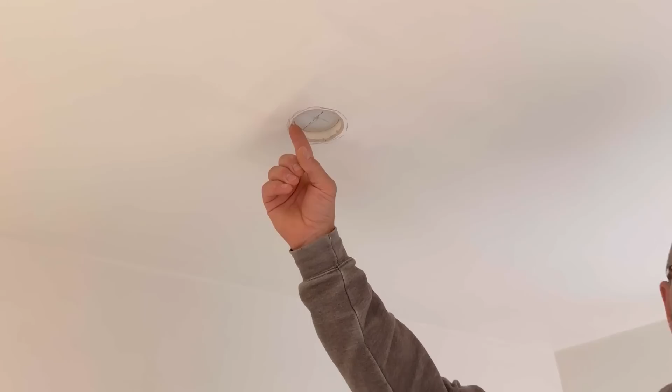If on your job you have people, now we won't use derogatory terms, who are stupid, incompetent, using too much haste and not the correct speed, overly rambunctious when cutting holes out my ceiling. We will show you later how we repair it and put it right.

Measuring stairs, building a step, finishing a floor, starting to plaster are a few things that we've got left to do on this job. And also, we need to talk about at some point the covering of this block work, which is going to be render at the bottom up to where the top of the screed is now, so bed here, and then at the top there we're having a nice cladding.

We haven't gone into that yet, but we will do in depth, and we'll have a little video for you because myself and Matt actually went to visit K-Rend in Belfast in February. So we did a little video while we were there, while we were doing our little rendering course, just to familiarise ourselves with the product, because that's what we're going to be using.

So we can talk you through that a bit closer to that stage, and then we'll put the video on for you as well, maybe in the midweek, maybe a Tuesday, just a bit of an extra, just to see me and Matt going through the processes of that and enjoying ourselves in Belfast. So we'll go through that with you. Right, let's have a look what we're up to first.

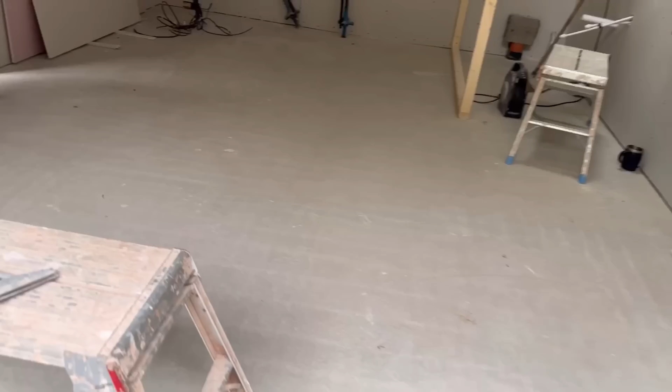Beads is what Matt's doing this morning. Good morning. Morning. This is where we left ourselves on Friday. I have just started to clear everything up. Can we get everything out of Matt's way now? All the tools up, all the timber. All this will go, ready for Matt to start getting pink on the walls again.

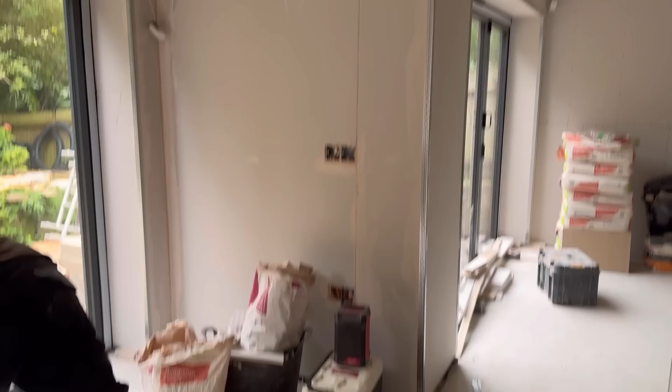I am going to build a step for there. We've already talked about it. I'm not going to say any more, I'm just going to do it. I'm going to build a ladder frame up for there, up to this floor level. So Matt can then run the plasterboard up, and then he can get around the perimeter of there, beaded as well, ready to do his ceiling.

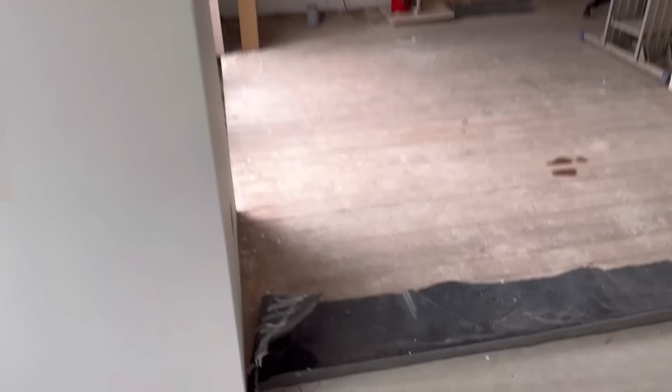And then I've got to put a piece of timber across there to run what will be the 9mm ply on top of this floor, which we've already talked about, over the top of that, onto the timber there, and put a bit of insulation there. That is the basement down there, you can actually see. There we are, into the basement. So I've got to get those jobs done.

And have a look at this extractor as well, I think. Try and get that in there. And hopefully that all goes in lovely. If it doesn't, we're in trouble, ain't we? It's all plastered and painted now. The ducting is there, look, you can see that. That's the ducting we put in a few episodes ago.

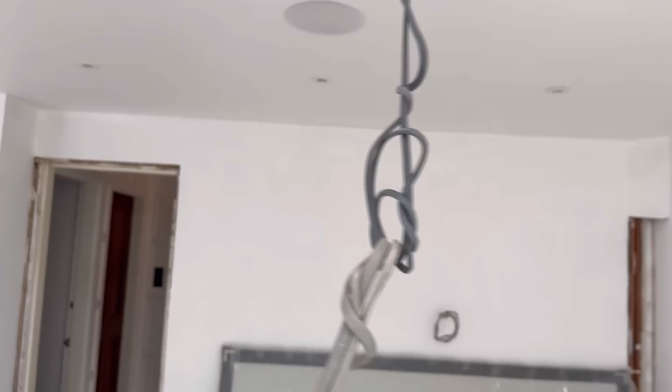So I will connect onto that. We've got some flexi square ducting. I'll connect onto that and hopefully fix this in place. That's another job we're going to do. So we'll just get on with it, I think.

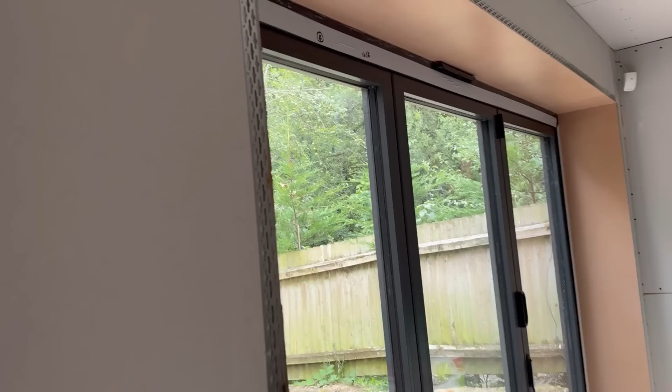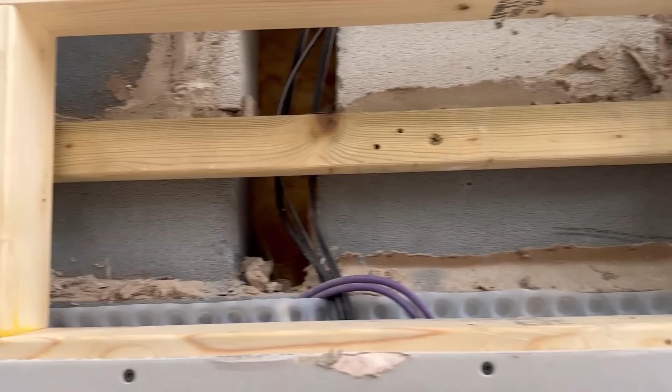Other than a slight conversation between myself and Matt this morning in terms of what we've got to do first, that time lapse and a little bit of footage there is the start of our day. All I've done off camera then is, on that ladder frame I've just put to level the floor up, I just put some brackets on it, fixed a bit of 2x2 to the wall, put some brackets in it just to sturdy that bit of frame and also that wall across that span of the stairwell.

What I've done then as well is I've just put a bit of insulation there, 150mm in there now, 3 lots of 50, just to stop the bit of cold spot that comes from the cellar down there. There may be plans in the future, who knows, to insulate this floor better from underside, but that's going to be something that will be done way in the future once all this work's done.

What I'm going to do now then, oh yes, of course, I forgot to mention Matt, didn't I? Can I forget Matt? Down there, look, skimming away.

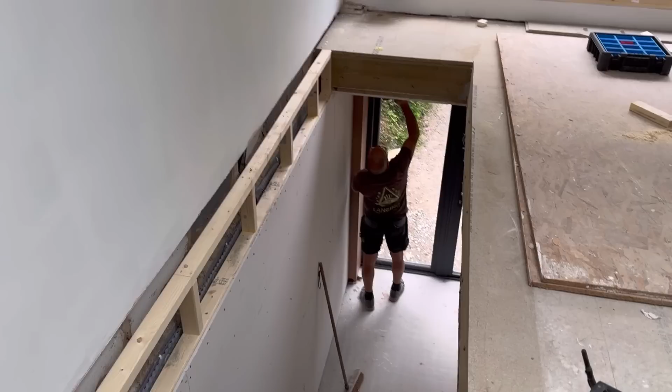He's done his reveals and got all the crap parts on, as he says, all the crap bits, so when he hits it tomorrow, he can hit full walls, not little bits like he's doing now. So my plan now is to tackle this step. I haven't really got a plan as such yet. Only thing I will say is I've got to build out past this, and a bit of that 3x2 CLS is just right to come past that.

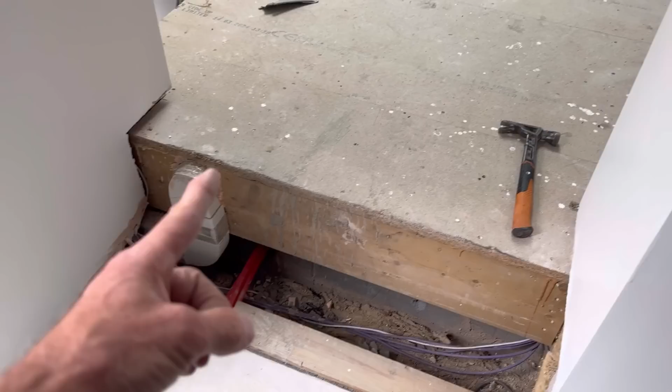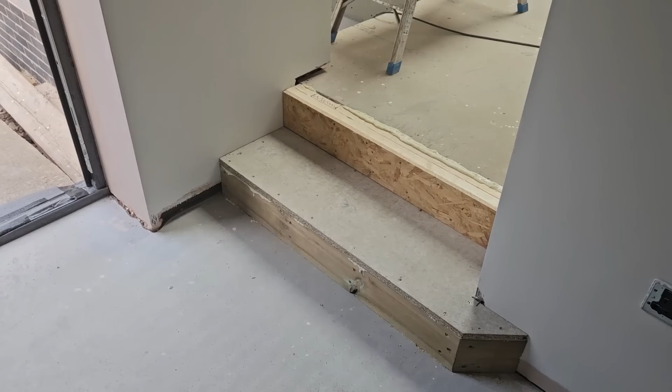And there we have it. The step is all complete, and I'm now using the customer's phone, which is a Google one.

There's mine, look. Dead as a dodo. I've been using it all day and I completely forgot.

Yeah, so I did all that. The only thing you would have caught me do with a hammer, I just took the hammer to these miters a little bit just to soften it off, because that will now be finished by the floor layer when he brings his flooring, I'm presuming, and likewise that he puts some kind of nosing on it.

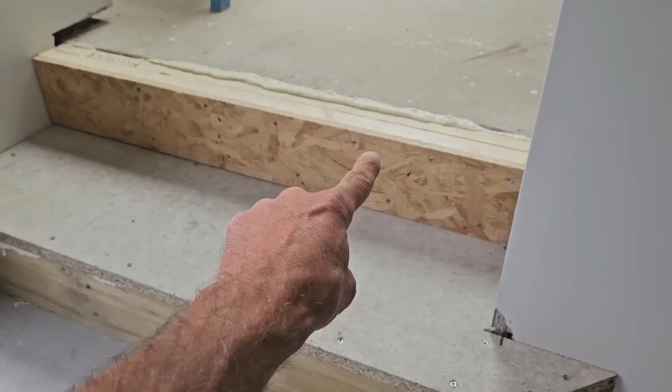There's 9mm ply got to go on there yet, so I've accounted for that in my rise of this step. So in effect, that rise there is actually 10mm lower than this one. So there we are, that's done.

Matt is all prepped downstairs. You can see, just there, look, as I showed you earlier, he was doing his plastering. He has boarded all this now, this ladder frame that I put on earlier. And you can see there, look, if I just do that, you can see the beads all around the edge, all ready to go. Let me just bring that back, there we are.

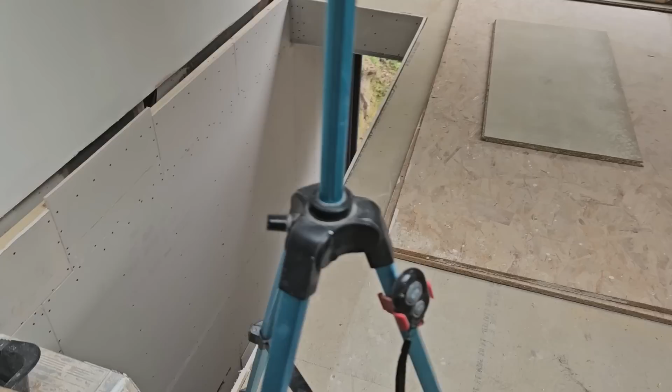And what he has done then is, he's allowed this plasterboard to come up 10mm. So when the 9mm ply goes on, that plasterboard is still going to be higher than the end of the ply. So you can't see the end of the ply here. That's what he doesn't want to happen, because unlike conventional balustrading, the customer is having a glass one.

So I'm presuming it would be like sort of poles almost. Newel posts, sorry, but round ones with a cap end on, and you just fix them to the floor as opposed to solid base rail. So we won't have any chance to hide that if we don't do what Matt's done there. So that's well thought out.

I am going to the warm roof extension job I've got going at the moment. Brickie's finished. He wants me to go and put the wall plates on for him. And we've had all the doors and everything check measured again today. So I am going to leave this now in the capable hands of Matthew to do some skimming. Over to you, Matt.

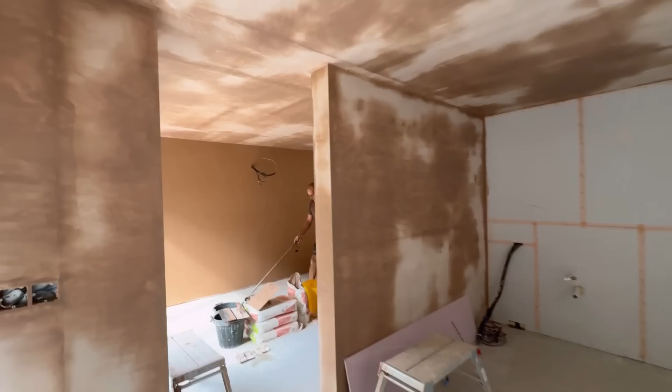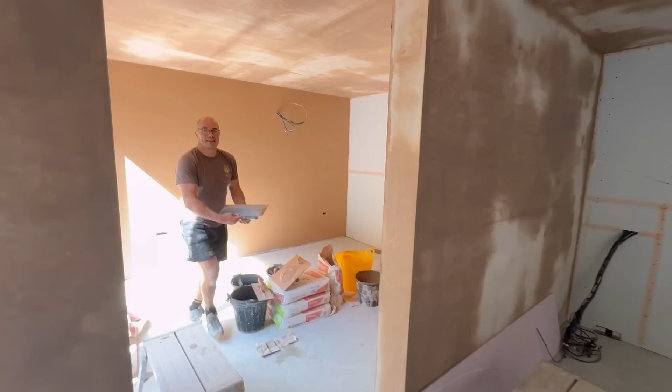There it is, ceiling was done in one go. 3 bags, you say, Matt? Yes, ceiling? 3 bags. He's done all this wall, which he'd done before I left. That's all finished. And he's just laid on that wall. And that wall. And that's you wrapped up then, isn't it? Not wrapped up yet. No, but I mean, when you've done down here. Yeah. Other than that toilet, but that's when the stair goes.

And we've already talked about this. Stairs going, then we'll form the structure for the toilet. And then we'll board it and skim that in one go, rather than trying to do bits. But what Matt has done to allow him to keep going, he's put a bit of board on and put his scrim tape there to stop it cracking, and likewise he's done there, and I believe he's going to do the same here as well. Put a bit of board, scrim it to do this wall, so we can do that wall and all of that wall then. That joint where this bit of stud will meet, there's a cupboard or something going there anyway, so you'll never see it.

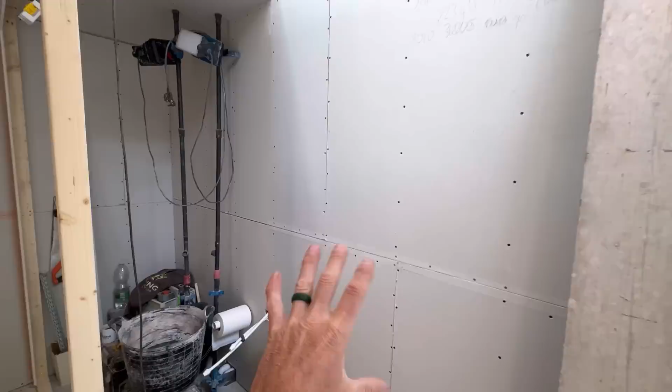If you are long-time viewers of the channel, you will know that we did 2 cold roofs here, and we were struggling to find a good product that hadn't got really bad reviews for lasting, something that didn't start to go wrong or come apart or just was rubbish to install. So we came up with our own method of venting the cold roofs. I'll go through that with you now very quickly because we've already talked about it before. Show you where we are at the moment with it, and I'll then discuss what I'm doing, which we'll then see in the time lapse.

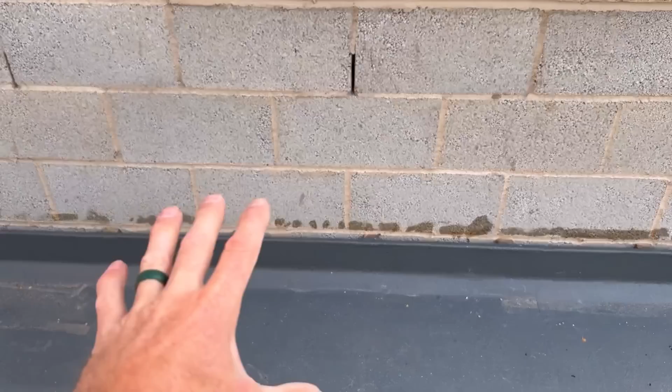So this is one of our cold roofs. Matt is currently plastering below me. If you remember, we put some laths on the wall there, we put a bit of 18mm ply on it, and then we've fiberglassed up to there. My plan now is to fix a batten on the wall, about 3 or 4 inches up, and then I'm going to put the lead on top of that. I'm using an alternative lead for this instance, which is a lot better, I think anyway.

And then I'll fix it to that, and that will then drop down over the top of that, and the 25mm will give us a space off the wall, and we'll still have a bit of an air track for it to carry on venting.

Now I haven't got to chop this one into the wall because when we put the cladding on, we can come over the top because we're double lathing. I want to put in one batten on there, we'll double lath and the cladding will come further over and come over the face of this, so we can pretty much come down this one anyway. So that looked quite nice because the 25mm lath you can see there, another one will come about there, and then the cladding itself, so it'll come nicely down the face. So that looked pretty good. So I think I'll just crack on with that.

Right, I'll try and talk through my plan as I do it. So I've got a piece of lath. I'm just going to mark a 10mm margin on the back, all the way down, just to make sure I can try and keep my lead as parallel as possible. And this 10mm isn't specific to anything other than just what I think it should be. And all it is is just to run the lead over the back to then tack a felt nail into the lead, and then I'll show you in a minute what I'm going to do.

I'm then going to fold it over the top of the lath and then dress it down the face. So I'll tack it on the back of there, dress it over there and dress it down the face of there, and then fix it onto my blockwork. But I'll have my lead sticking up in the wall. Once I've tacked it, I'll have my lead sticking up like that. I'll then fire this into the blockwork, so I can use my nailer, because Paslodes are going into these Fibolite blocks lovely. And for the sake of this, it's not structural, it's just going to hold it until the cladding goes over the top of it.

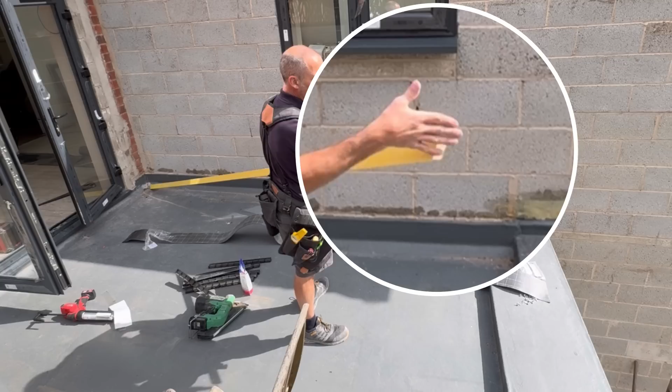So if I just set this on here now, you can see that on the camera, I've just chamfered this off a little bit, just so when I dress my lead, it dresses in a bit nicer rather than a square edge. So I'll get this the right orientation now. So that's the top, that's the back. Get my lead sat on here now. So this is the alternative lead stuff. It's got like a stipple effect to it. I think it's quite nice. It does finish it off quite nice.

So I'll just take this, let me just get this the right way around first. So I'm doing that like that. That's going like that, isn't it? So I need to do that the other way, so when I dress it over like that. So let's take the right face off to start with. There's a protective film on it first. So let's just take that off. Don't think it really matters whether that comes off the back or not, as I'm not going to see it, but I'll take it off regardless.

This is a lot more lightweight than normal lead, but it's just as cumbersome to use. Oh dear, it could do with a couple of people, but Matt is flat out downstairs, so I shall struggle through on my own.

Right, that'll tack on there now. Like that, I'll put that right on my corner. Let's just make sure that goes in the right place. If that goes on there like that, and that dresses over like that, that'll be about there, overhang. That's right, there we are. Right, I'll put my first nail in there now. Just tack that on the end.

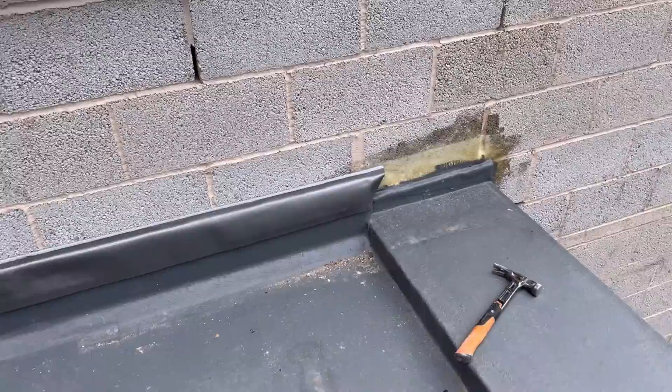Right then, so that has worked rather well, even if I do say so myself. There is a void now, as you can see, just there, look, about a 2-inch void. What we do with that corner now to make it look tidy, once we start looking at the cladding, we will deal with at that point. If it means an extra piece of lead just pushed up the back and then dressed over the face of that one, and then an open end there instead, then we will do that, but I'll leave that for now in case that's how we want to do it.

But that's why I chamfered my batten off, just so I could dress it around nice and tidy like that. There's balustrades to go and everything there, so that's a bit of an anomaly at the minute as to what it's going to look like when we put together all the bits in that corner or on that face. So I'll leave that for now. As you can see, that's a bit of a stipple on the face of it, but it does go quite tidy.

Use is exactly the same as lead, but like I say, it's an alternative instead. It's almost like a bitumen type roll, you know, the flash band. It's almost like that, but it's not. It is an alternative lead, and the brand I've used is this one there, ICO.

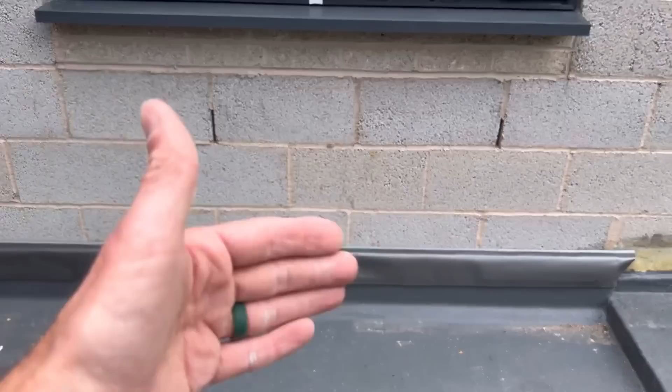So there we are. I've done a lead mastic bead across the top for now, just to seal it in. As I've already mentioned, once the cladding goes on, that'll be sealed anyway. I've dressed it down as best I can for now. I don't want to mess with it too much. When the heat gets on it, that will settle itself. And if I need to just tap it again gently against the face of the roof upstand there, then I will, to make it nicer.

That will remain as it is for now, just dressed against the block wall. That is all sealed in that corner anyway with fiberglass. But I'll leave that for now. We'll see where we are in terms of the connection of the cladding against the render, and then we'll deal with that when we come to it.

All I've got to do now is go on to what was the garage roof, which is now more the utility, to do exactly the same procedure, other than I will have to screw it on, not nail it on, which is unfortunate. It won't quite be as quick, but I'll do exactly the same as that. I'm not going to film it, I'll just show you when it's done. So that one is done as well then.

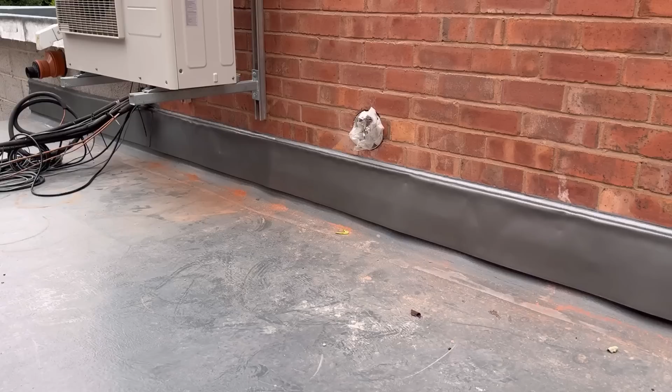The only difference being I had to fix the batten on the wall first rather than nailing it on, and I used a 60mm hammer fix. Love those fixings, ideal for this kind of fixing that's required. Nothing too structural, just a batten, which is what they're mainly for.

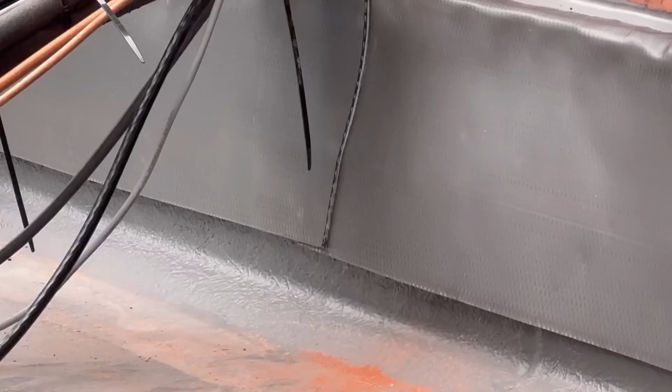And just under the pipes there, you can't really see, but there's a joint there. I've just masticed that in, and that is at the point where the blockwork meets the brickwork. We'll be putting the cladding up to that point and go around those pipes nicely with some kind of escutcheon or something if I can find one, and it'll cover that joint anyway, because we'll bring the cladding further down.

Now, as you can see, that is sort of sitting a bit flapping at the minute, but I'm going to let that settle because it's been in the sun. So I'll let that settle, then I can dress that down a little bit better.

But ultimately we don't want it really tight anyway, because that's our ventilation for the cold roof. That looks nice and tidy. I've put mastic along the bottom. I've taken my wedges, cut it into the brickwork, so you can just about see it there, can't you? Where I've cut my brickwork. I've pushed it into there, I've put my wedges in, and then I've lead masticed across the top to seal

it all in. And like I said, over that point from the block work, that will all be covered with cladding pretty much anyway, down to maybe 100mm off the roof. I've just cut that off as well. We have got a cover plate with a built-in fly screen en route to cover that up. So that'll be here tomorrow, hopefully, via the old Amazon. That'll be great. So let's go and see what Matthew has been up to while I've been messing up here.

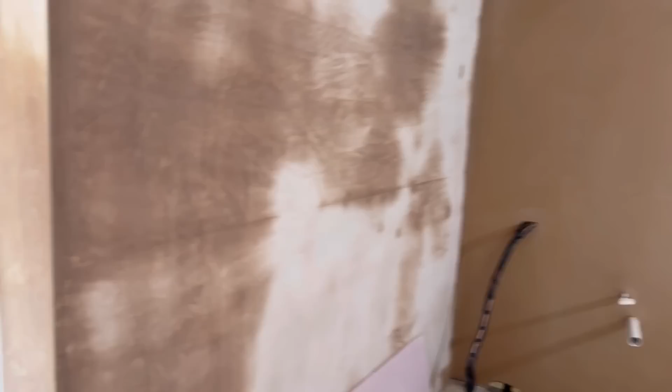Ooh. There's some more pink on the wall. That one's done, and this one is also done.

You can feel the warm in here, can't you? It generates the warmth, doesn't it? Yeah. Or is that just coming off you? Both. A bit warm in here.

Tomorrow then, that wall tomorrow? Yeah, just what's your plan? Obviously what we can do, which is pull the big wall in, see what we're going to decide about the toilet. Maybe to the side you've already talked about regarding that bit of board there, just put a touch of board on. I'd much rather tie it in than not. Well, yeah, and just like you've done there, bit of board, scrim the corners so you can skim that in, and then we'll do exactly the same there, and I can just put some 3x2 packers on there and pull the timber out so it comes here to catch this board and then the next board coming through here.

That'll work. Correct. Right then, bit of a tidy up and make a plan for the ducting upstairs maybe, do you think? Getting an extractor in? That's a two-man job, isn't it?

Yes. Two-person job. Sorry, two-person job. No, it's not. No, don't go into there. Yes, okay.

Right, what I think we're going to do now is go and sit with the customer, and we're going to go through the Stairbox app, and we're going to input all the measurements that I've gathered together so far. And after this footage, I will explain to you what the measurements are in terms of floor to floor, ceiling to floor, and tell you why again. I've gone through it already, but I'll discuss it with you whilst we're looking at the app at the same time.

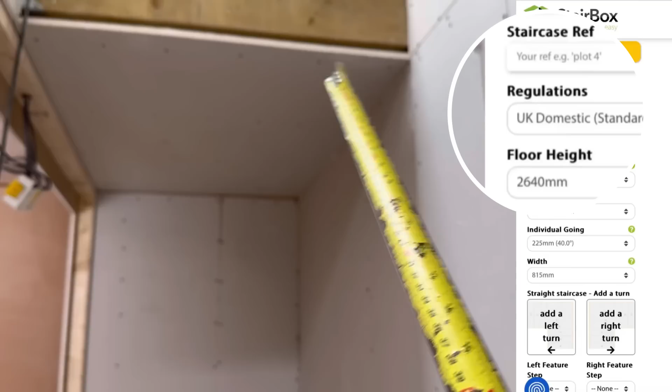Right then, I've just sat with the customer. We have gone through the app, and I spoke to a very helpful gentleman called Sam. And if you can see at the top of the screen, bottom of the screen, can't remember where it is now, I will show you now. There is a reference that if you get a bit stuck or you want a bit more information, you can call them. They can then look at what you are looking at live, and you can discuss it with them. So I gave him my floor to floor height, which is from there, where your stairs are going to hook onto there, and that's all the way down to here.

Things to remember, if you know you're going to have something like an oak floor on here, then you'll need to allow for that when you're doing this measurement. Just like I have allowed for the 9mm ply going on that floor there, I've allowed for that in my height. So I know that when I put my stairs in, I'm going to make sure that my nosing that goes at the top of the stairs is flush with the 9mm and not with that chipboard flooring. I know that we are having Karndean on here, LVT, so I haven't allowed anything on my height other than a couple of mil.

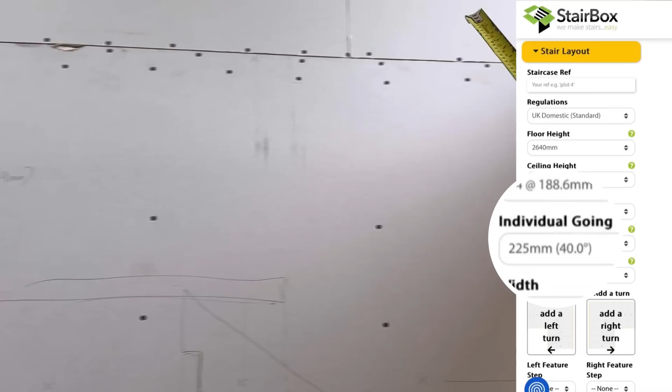That's all I've done. You then have to input the ceiling height, which is finished plasterboard to finished floor, bearing in mind your floor covering, again. You then have to go from here to the point where you want your stairs to finish. Now what I did with Sam on the phone, I actually gave him this opening size, which isn't normally what's going on the website. It's normally the point where your stairs finish.

Now if you've got existing stairs and you're changing them, you'll be able to mark it on the floor and then measure it. Now we were sort of thinking, if you remember, we're going to finish about here, which is 2990 from there to this pencil line.

However, like I've talked to you about before, and it's on their website, you can look at the head height checker, which is why you have to put in your finished floor to finished floor and your ceiling to finished floor. This is what it allows you to do, is check your head height, which has got to be 2 meters from here when you stood on your stairs to a tread.

We've had to move ours in to 2951, so we've had to come in 40 mil because we were quite tight on our, I believe it was our second step. So it'll come up from here, step up, step in. When it steps up again, from that one, the second one from this floor, it was tight. It was going to be under 2 meters. So therefore, we've had to pull that measurement in.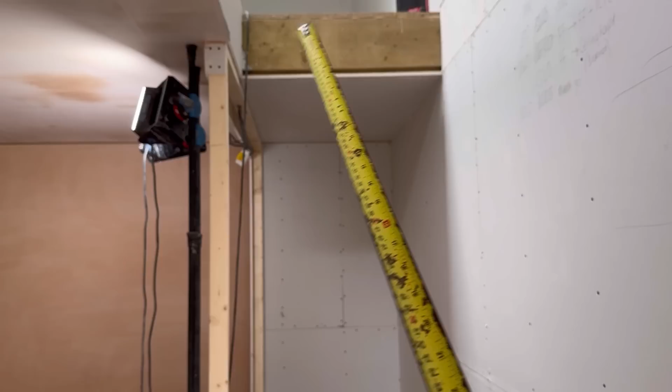The other one is, the customer is having a handrail and balustrades. He's having an oak stairs, and it's a glass embedded balustrade, which will look lovely. And you have to input this width, or in your case as well, just make sure you input the narrowest part. We are about 10 mil difference from this end to that end, just because we put this wall in after this floor went in. So this is the narrowest part, so I'll give them that measurement.

What they've then done for me is they've inputted it into their system and given me a clear newel post width with my stairs on here. Now I'd originally looked at 870 before we realised there was newel post things to go in, and it's actually now reduced to 815. And the reason for that is, Matt, have you got a pencil please? Sorry. Thank you. Little drawing for you.

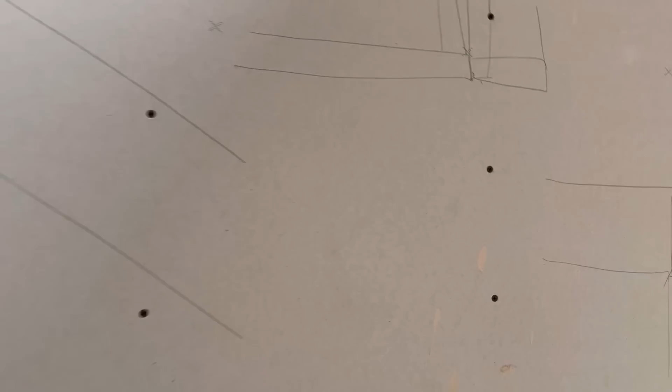So if we come in a little bit, there we are. So we just come back a little bit. You've got a newel post like that. And your stairs stringer, which is the bit that carries all your treads on your stairs, that comes up like that. And obviously continues down to your floor. And then when your handrail goes on, let's say for argument's sake, that's normally about 90 mil square, roughly. 90 mil by 90 mil. I think it is anyway, something like that, depending which design you have.

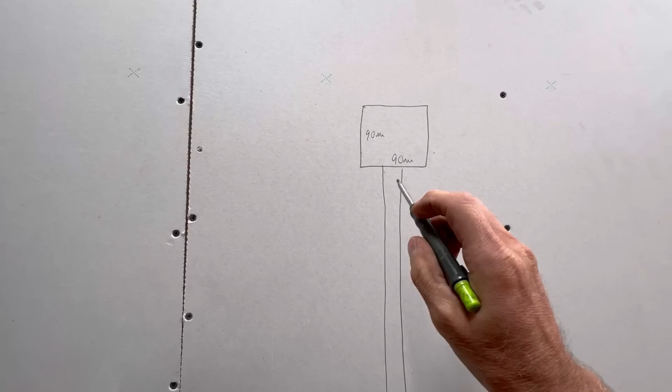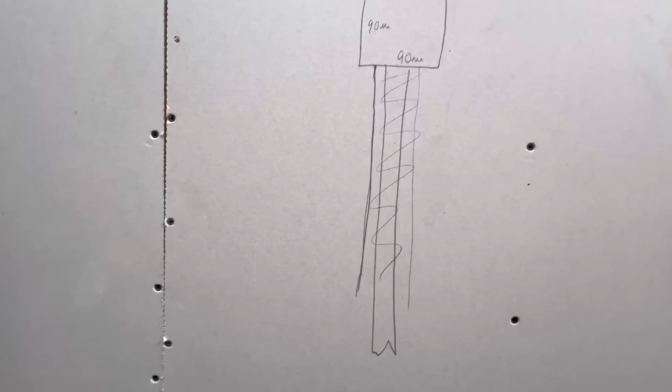And then they've had a handrail that is, I think he said it's 57 mil. So if you imagine that's your handrail, sits on top above your stringer then, like that. What you've got to have is a clear, I mean that's your handrail. When you've got your hand on that handrail like that, you've got to have a clear 20 millimeters from there to any obstruction. And in this instance, just get my tape out again as a pointer. That there is our only obstruction.

So when the newel post sits over the top of that stringer, and again you'll see all this fitted when we come to it, you've got to make sure that when the newel post goes in, I've got a clear 20 mil, so I can run my hands up the newel post, up the handrail like that, and I'm no closer than 20 mil to that wall there. You've got to do that. I do believe that's part of building regs.

So it's ended up now that even though my opening is 870, I've got a stair width now of 815 mil, which means that from my other stringer, which is there like that, from this stringer, from there to there, opening is 815, despite my opening being 870. Because I've got to allow for this to stick out, and also the clear 20 mil on that as well. So there we are. So we'll go through that in more depth when we come to it.

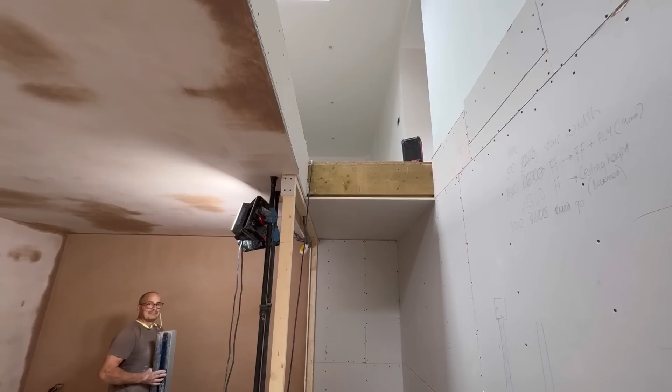What you, Matt? Can I say it? No. I will. Boring. Right then, let's go on with something else.

Well, I thought I'd start my day with a bit of trauma, cutting holes out of fresh plastered ceilings to find cables. The only ones we were slightly close on was these ones. You can see on there, we're right close to our little 200mm square, but we knew that anyway because we wanted to make sure that we got these equally spaced, which meant that was going to be right on the edge of the joist.

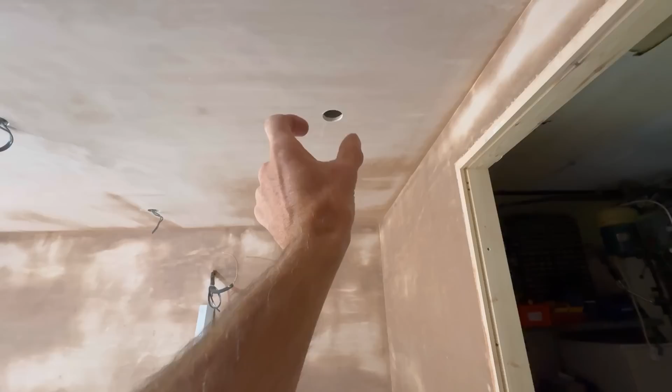We knew we were going to be close, and we were, so luckily we were bang on with that. We drew our little plan on the wall. We adjusted it a couple of times based on whether our plan said off finished walls or block walls, and then luckily Matt remembered that measurement there, because we measured it off the 4x2 on the ceiling. For those of you that have been watching for a while now, you know what I'm on about.

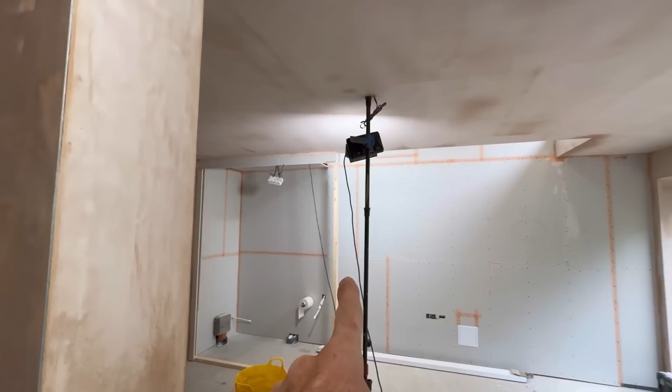We've built this out, so obviously this is wider now by one width of that CLS 3x2. So luckily Matt remembered, and we took it off this measurement, and then we luckily dropped it in the middle of our box there, so that's great.

Matt is upstairs doing a bit of bonding on a mistake that I'm not going to say that I made, I'm going to say that we made. All right. We did. We did.

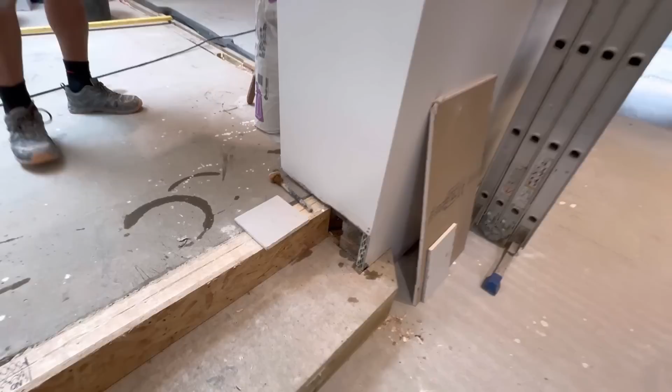So the first bit of his bonding and boarding he's got to do is just that little square there. And for the viewers' information, that's not a mistake by Richard. No, that isn't my mistake. No, that isn't anyone's mistake. We didn't quite know what was happening with the step, whether we're going to build this step out to this point, and then have a step down. But as it was, we all decided to leave it there rather than pulling it out to this point. So I think originally we were thinking about pulling it to here. Hence, it wouldn't have mattered because that would have been covered when this came out to there. So anyway, sorting that out now.

He's going to do that, and then he's going to have a look at my mistake up there. My middle, yes. But we'll go into more depth of that later on.

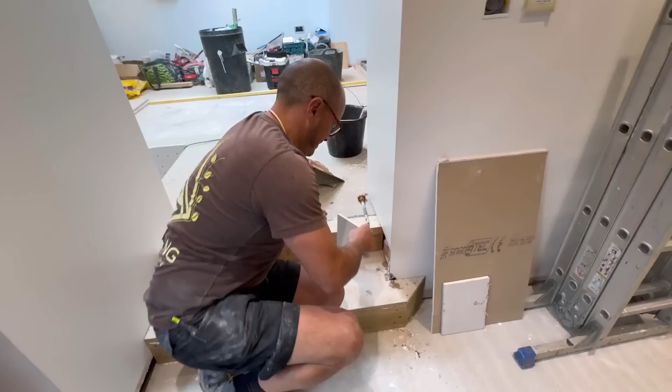Bit of bonding, bit of board. Unibond on the joint as well. Unibond on the joint of the two boards. Yeah. Why'd you do that? Just to stop the suction, so you take away the chances of a crack. Oh, okay. If it's too dry, it's just going to split. So the edge of the board's too dry. You've just put a bit of Unibond on the edge of the board on this one. Here. And on that one as well. Just there as well, yeah.

Okay. Because now, if you're doing skim, you've got less chance of stopping it cracking because we're not scrimming it. Yes. So we're not going to scrim and then go all over a freshly plastered and now painted wall. Yeah. So we've got to butt up to it. So we've got to make that joint as solid as possible. Right. So what I've done is I've unibonded it after V-cutting it as well. You'll see up there in a minute when we describe it. I've gone around the edge with the Stanley knife to form a bevelled edge. Oh, on the edge of the board, yes, I can see that. And also that's been unibonded as well to stop any suction.

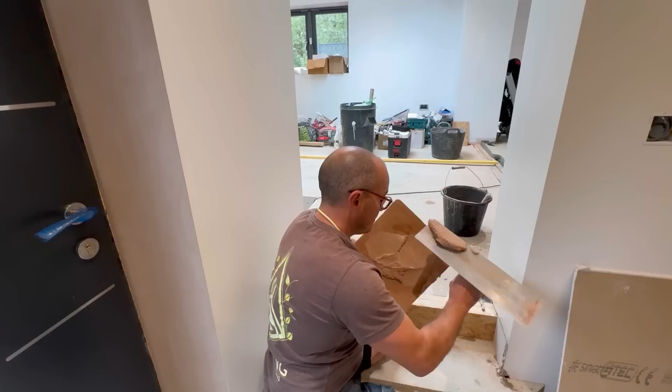Right. Again, we'll go over that in a minute, but this, and then just to add the strength back in it, you know, or possibly going to cover the skirting, whatever, I don't know. Yeah. However, because the joint might show, bond up to it, because the bonding is going to be a lot stronger than the finish, and then just take it off the joint. Plus, I suppose it's quite a bit of a space out where it could be kicked or whatever if it's not plastered, not skirting boarded. And it is stronger than just board. And then just level it off. We can leave that for the moment.

And will you leave that flush, or will you have to pull that back a little bit to allow for the thickness of skim? So on the joint there, once it's pulled in, go across the line, just to create a skim line, and then yeah, we will just take it back slightly. Because you're only talking a couple of mil, aren't you, with skim? Yeah. And you said you use the fat when you plaster, just a bit of fat.

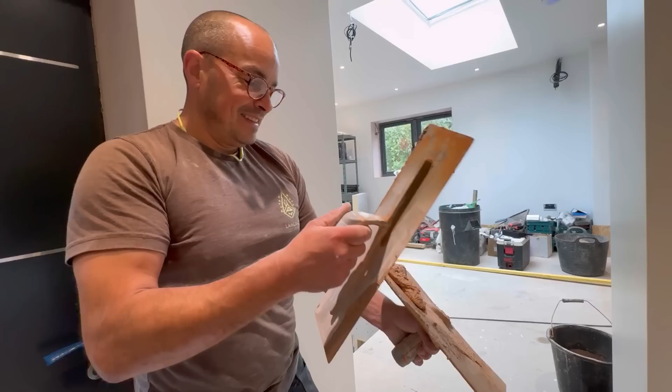I'm the one that's had to loosen my belt after my holiday. Half an inch. Ridiculous. There we go.

So first stages, we have put that disc in, a bit of 9.5mm board with a bit of CT1. As Matt's already said, he's chamfered the edge of that board as well. That's the first stage. And then a bit of Unibond over the exposed edge of board. Yeah. So this was done with 12.5mm. The reason I've used 9.5 is exactly the same there. We want to put as much strength back in this ceiling. Even though, vertically challenged as I am, you're not going to go along and start banging the ceiling, but let's put as much strength back in it as possible.

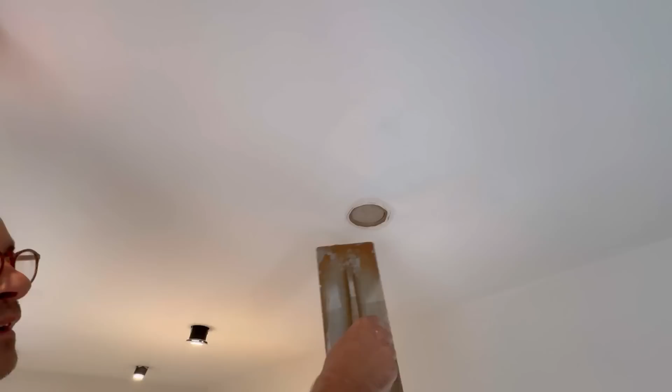So 12.5, that would have come virtually flush with the skim, and then obviously the skim of what we've done originally. But I want to just pop some bonding in it, and if you can see that, just to add some strength. Why wouldn't you always try and add as much strength back into something as you possibly can? Does that mean there's less chance then of it cracking and seeing like a ring on your ceiling almost?

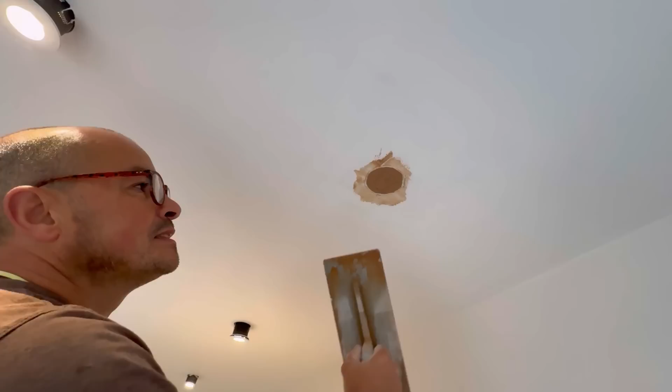Yeah. So just make sure that the consistency of your bonding's there, so you can work away, so you get it into the edge of the board. Because yes, with CT1 on it. Yes, CT1. And leave it slightly proud, because it's still wet. If you start messing about with it, you're just going to hollow it out. But so long as you've forced it up there.

Now the board was cut using one of the circles that we took out for the spot. But that's fine as it is there now. And you can trowel it up, get it nice and flush, cut it back, and then we'll skim over it. Nice one.

So back at it. As previously, hang on, let me put my sports teeth back in and stop sucking butterscotch. Butterscotch. Sorry. This isn't very good TV, is it? Oh, take two. Right, go on then. We're back at it.

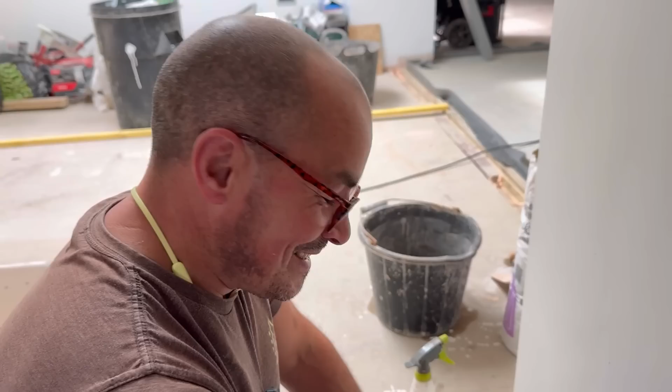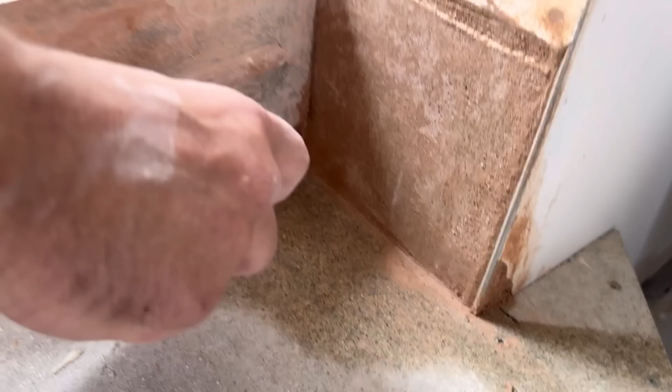What are we doing? Right, as I said before, I like to trowel it over, so this has now gone off to the point where we're ready to lay the skim on. Now, because we're jointing up, if I'd have put that flat to the bead and flat to that wall without cutting back, the finish has got nowhere to go to. So is that face there a bit further in than this one? Just a touch. But to make sure that you get enough, just use the toe or the heel and just take that back, and then the finish has got somewhere to go to.

Okay, so you put a V groove there where the bead is and a V groove where it meets the plasterboard. Because if it was just plasterboard and the bead went onto the plasterboard, that's flat, that's ready to go, that's a couple of mil. But if you're putting finish on a flat surface, it's going to hump. Yeah, it is. Now that's not a problem as such, even though you still do it. Now up here, this is where it is important, because you've got an open area of ceiling, which is perfectly flat.

Oh. Meow. It is perfectly flat.

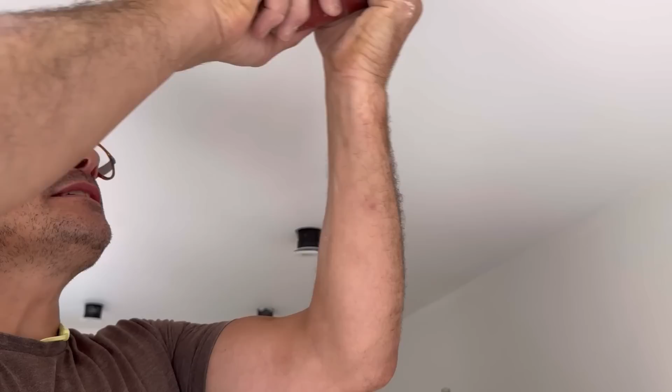So all I've done off camera before I troweled it up, I ran along. If you look at the curvature of my trowel, it does go over. So when you go across it, it takes a little bit out, so it's like that. Again, you've got somewhere for the finish to go. And you've done the same all around the perimeter of that hole. You've just knocked like a V groove out. I can do it with the toe of the trowel. You can do it with a screw, a nail, a small tool. Anyway, and now that's got somewhere for the finish to go to.

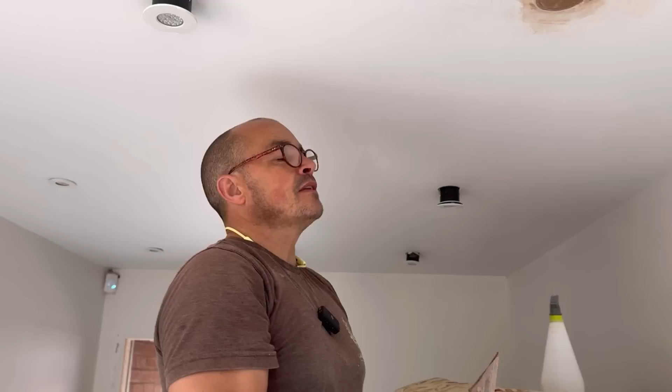You clean off all your plaster fat around, so you've got nothing there. That can be wiped off afterwards, should you want to. Or just like a wet sponge or something. Yeah, or a dry cloth after, microfiber cloth, that'll take that off. Right. And especially with the finish. Now, all this becomes, as you've seen before, and we can pip it or whatever.

Does it matter what stage your plaster's at? So that looks like it's... I know you've skimmed downstairs, we'll show you in a minute what he's skimmed. He's already done down there. So what's left on his board now is just what you call the fat, don't you?

Which it's not quite gone off, but it's not as sloppy as it was when you put it on the wall. It's still usable for me. It's still usable. Now I'm using this knowing that it will pull in at the same time as that, and I can trowel it up and keep on top of it, no problem. Now, for anybody doing it as a beginner, DIYer, improver, just take your time, knock up some more. You only need a cupful.

Okay. I'm glad my sports teeth were in for that.

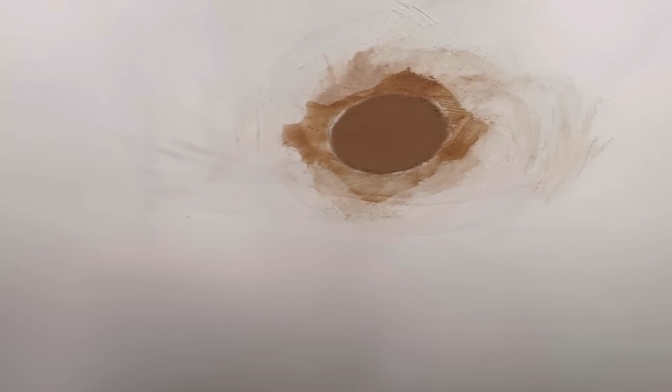Right, and again, working it away. So you fill all your edges, and just like you would anything else, lay it on, come back to it two seconds after you've done the other patch, and double it up. Okay. Again, down here. Do it upside down, work away, clean it off, work away, clean it off.

Always keep your joint nice and clean. All of this you can brush down after, and you are going to double it up. So, but that plaster has gone somewhere now, hasn't it, as you can see. Yeah, it's gone into the grooves. Filled into that edge. The edges and the bead. Go with the straight edges, and then you're not going to pull it into all sorts of shapes.

Again, just clean it off. That'll all wipe down and repaint after. Leave it for a bit. Leave it for a bit, and I'm going to double it up in a minute, just when that's stabilised on top of that undercoat. Up there.

Whoops. There's your ears. That's a microphone, boss. Oh well. Oh God, can't be trusted. Jesus Christ.

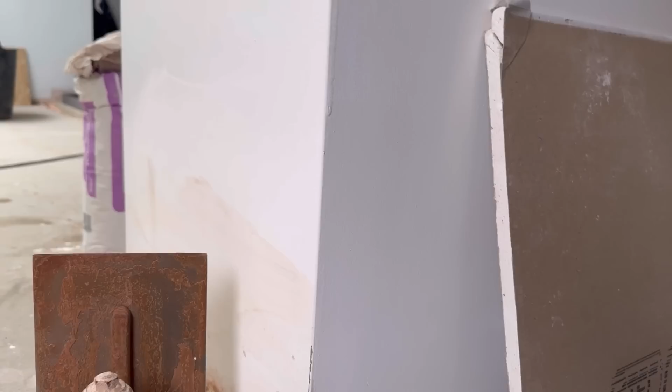So, normal time frames of leaving plaster before you give it a final polish off have occurred. And you have now polished it off. Let's get down here. And you can't really see. Touch the joint. No, give us your trowel. Go on then. You don't want to do it with that one. Oh, hang on, have you checked it? No, because it's got a massive curve in it, hasn't it? That's pretty good to me, that is, Matthew.

Yeah, but don't forget you got where it's worn away over the years of travelling and use. It's a good excuse, Matt. Stick to that one. Good excuse, Matt.

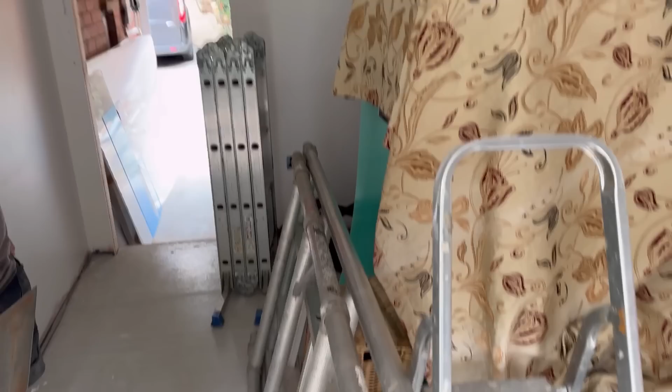Yeah, nice one. What I can say is, you can't feel any ridge or anything at all there. The proof will be when it's painted. That's when you see it. Of course it will. But I'm confident that you won't see that. No. And the same with that one. Oh! Who's put that there? Yes, when it's painted, I'll show you again, but I've just walked into that one. I've just put it there.

Because the next job is we are going to attempt to put this extractor in. It's in the box down there. We've got to attach the reducer. We've got to attach the square flexible ducting onto that first with a little bit of the ducting. So we'll gunk and silver tape it onto there.

And then on the other end of the square ducting, we have then got to fit this, which reduces us from the extractor, that end, back down to the ducting that we've got, which ultimately, when we put this square ducting on, will be gunked and zip tied and taped onto that. And hopefully, all being well, it'll be great. That was all a big setting up and getting it ready prior to plastering. So let's hope all the setting out and working out has all worked, shall we?

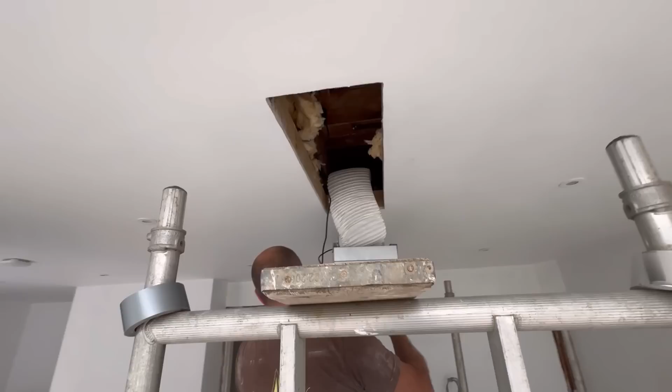Well, we could be showing you some more hints and tips of how to repair ceilings after they've been painted, couldn't we? We could. There we go. Or not. That's coming up next. We thought about filming the whole process, but you know what? No, it's an absolute pain in the derriere.

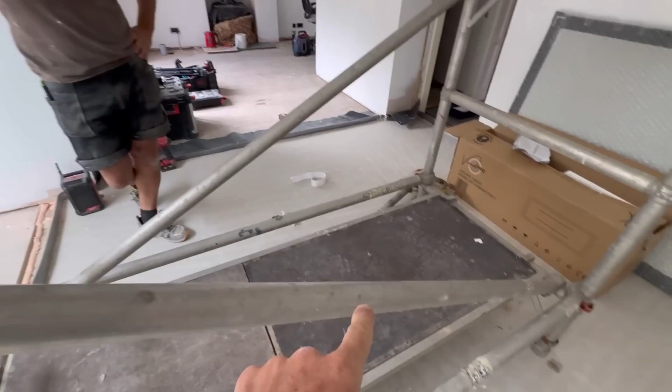All we're going to do now is swap ourselves around and pick this up a little bit so Matt can then get in here to finish connecting that ducting. Oh, you can't see it. We've basically put it in there like we did before, taped it all, silver tape, like we've done with that one there, look. And then we even put some of this good quality duct tape on, just to stop it moving. We don't want this to pull once you start to connect it, which it shouldn't do. So we're going to adjust ourselves, push this in the ceiling.

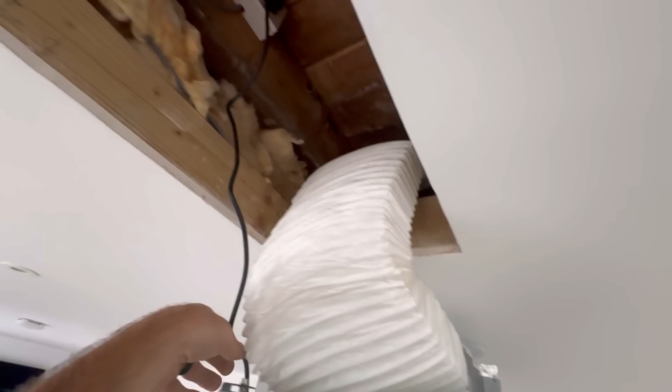We are already plugged in up there, so hopefully... I don't think we'll be able to try it because I don't think it's wired in yet, because if I understand rightly, one of that lot of wires there is the feed to up there, so we can't actually get it working, which is a shame because you could have tried it, couldn't we? We could. So there we are. We will endeavour to get this up.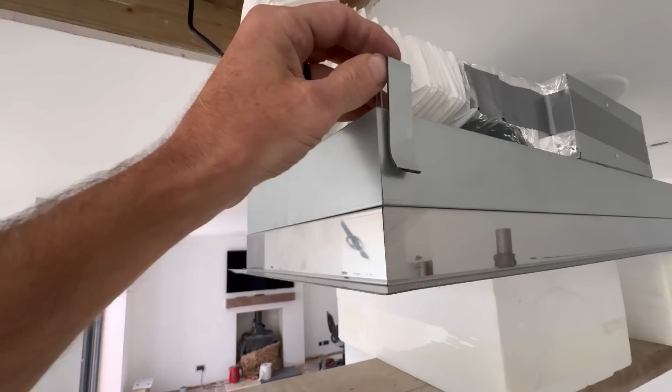Oh, and also we've had to cut these brackets a little bit, because what you do, you push these brackets up and that there, look, then clips onto your timber. But if you've been watching the channel, this is a false ceiling, so that there is as much as I can go. I can't go anymore, and these brackets were originally set at 35mm. So I've had to cut them off. That one, if you look, I've had to cut it off a bit smaller. So when that goes up, it clips on top of there.

That side's okay, because as you can see, it's a bit smaller, because I had to make up the ceiling there with a bit of batten, because my other main 4x2 is behind this. So I've had to make that up there. And then what we have to do is put the screwdriver in the holes under here, push that up, and then tighten them up until this bit sits on top of the timber and it clamps. This bit clamps to there. Right then, let's get on with this then.

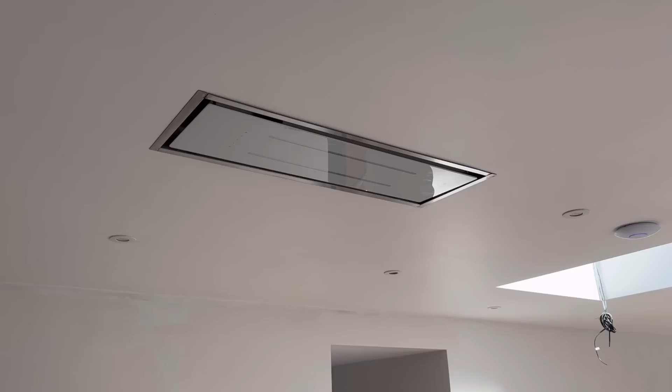That was the biggest ball ache. Oh God, what a shocking thing to fit that was with the space that we've got. The brackets, poxy, just a big bag of no. That's what that was. It's in, it's done, it's fixed, it's not going to come out. That's it. Looks good. It does look good, in fairness. And when we can turn it on, it'll look even better. We have had a good tidy up.

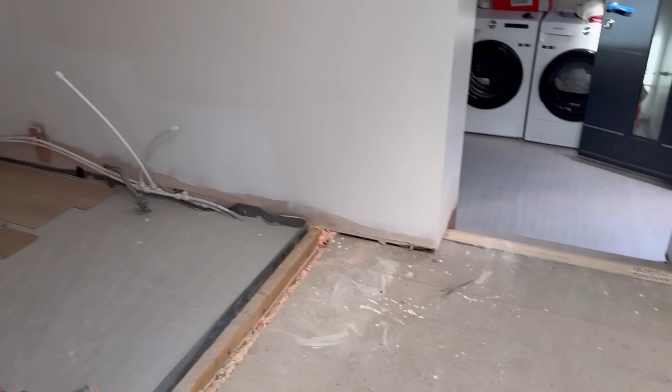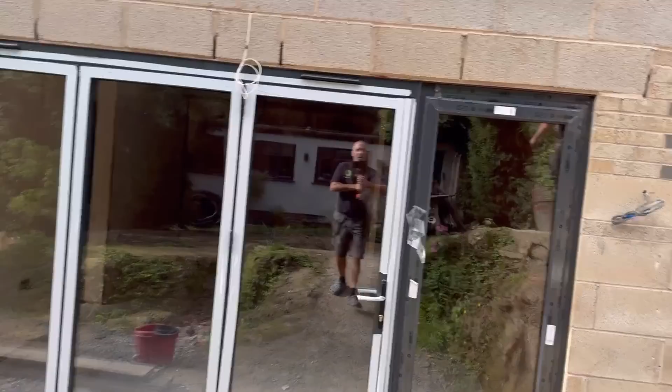We have covered the hole now, since we're not here for a few weeks, because we are now waiting for the kitchen. That will be there. We are waiting for the utility, that'll all be in there. We're waiting for the lovely oak with glass balustrade handrail for there. Is it locked up downstairs, Matt? Should be. Matt has completely finished, up to date, as far as we can get anyway, to the point where we can't plaster anymore.

We've already talked about it, but that wall's all done, look. That wall's all done. It's all complete in here now. Just needs to dry, and then by the time we come back, I dare say this will be painted. And when we do come back, stairs will go in, that wall will go in, it'll be skimmed, and then Matt can start doing joinery. Albeit we wait for the floor to go in, so you can put the skirtings on top of the floor. So there we are.